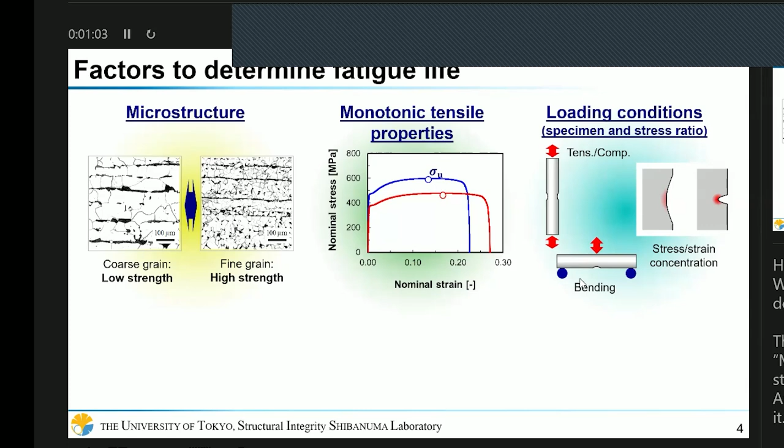Research background. How can we predict fatigue life? We know several dominant factors to determine fatigue life. First is microstructure, and monotonic tensile properties also has strong correlation with fatigue life. And of course, the loading condition affects it. So based on this information, we should be able to predict fatigue life.

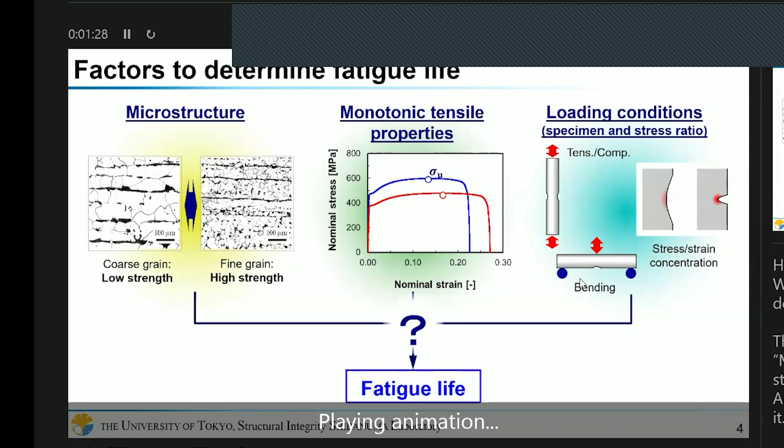However, the quantitative relationship among them has not been clarified yet. So the purpose of this work is to solve this very basic issue by establishing a multi-scale modeling strategy. That is the purpose of this work.

Next, I will show you the modeling basis based on experimental observation, which is the most important part of this presentation, though it's not numerical work but experimental work. This slide shows the test and observation conditions.

Using an ordinary materials testing machine, we perform tension compression test using a smooth specimen like this. And we observed the crack initiation growth process using a high magnification camera.

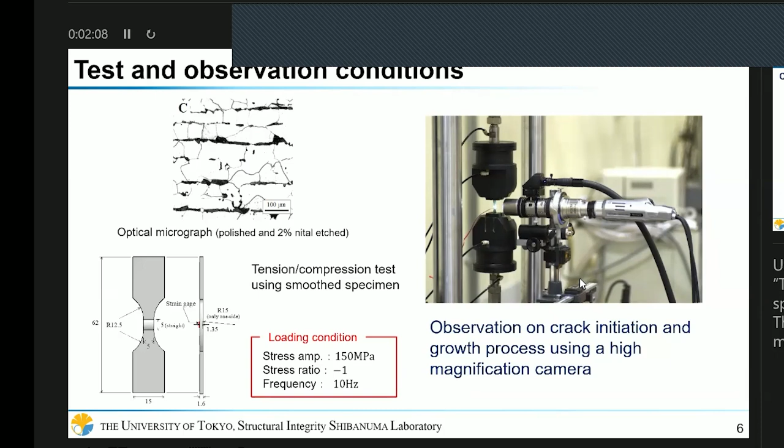This slide shows the observation results. The final number of cycles to failure was about 220,000 cycles. It's a typical ordinary high cycle fatigue condition.

This photo is a crack initiation site: 0 cycle, 2,000 cycle, 5,000 cycle, 10,000 cycle, 100,000 cycle, and 210,000 cycle, just before failure. So we can see crack initiation and growth from here.

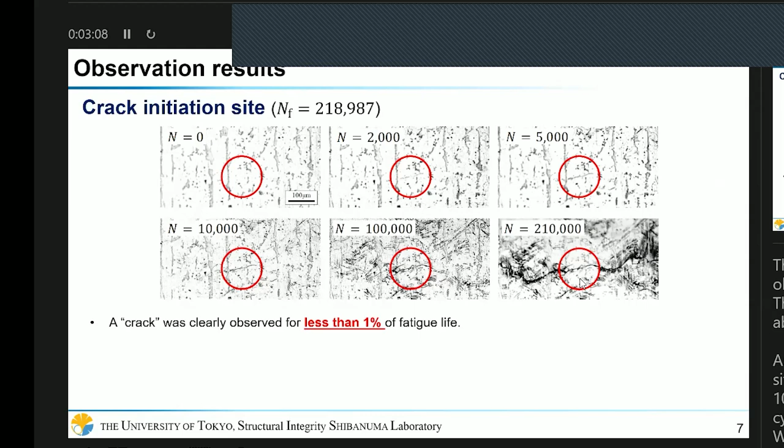At 0 cycle, we can see nothing. However, at only 2,000 cycles, a crack was clearly observed, even though it was less than 1% of the fatigue life.

This indicates that a crack initiation life does not exist, or is negligible, at least in this kind of material. In addition, from the last photo, we can see that the damage caused by the activation of multiple slip systems clearly increased after the crack passed the first grain boundary.

So the stage 1 boundary, between stage 1 and stage 2, may be defined by the first grain boundary like this. We developed a model based on these experimental facts.

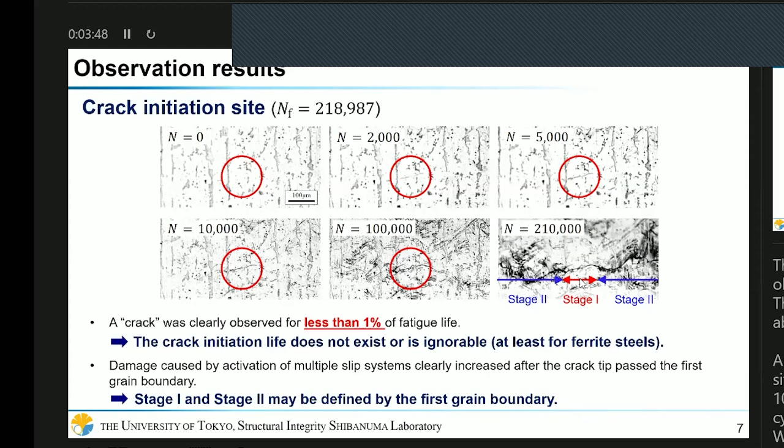I will show you the outline of the model presentation. This slide shows the modeling concept. The first one is the calculation of fatigue life.

Based on the experimental observation, it was difficult to define crack initiation life, though it is a very common approach for predicting fatigue life. But we ignore it. The entire fatigue life is estimated only from crack growth life. This is the most important concept of our model.

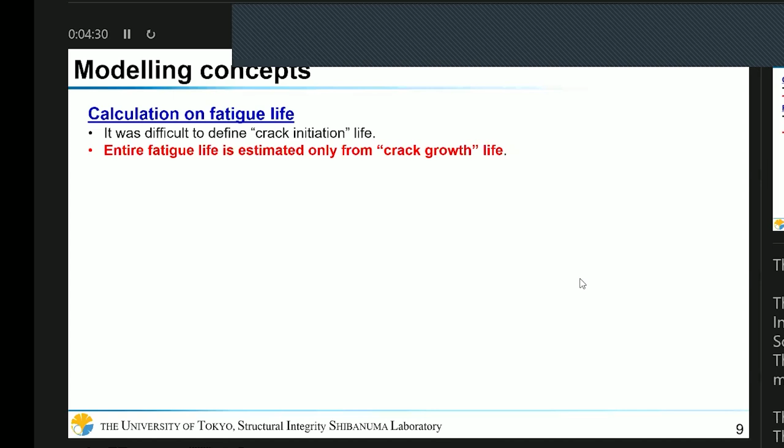The second one is the required input data. As I mentioned in the introduction, the microstructure information, monotonic tensile properties, and loading condition should be dominant factors to determine the fatigue life. So we use this information as the input data.

We don't use any adjustable fitting parameters, and we don't need any preliminary fatigue test data for the target steel. So it means we provide a pure prediction.

The third one is the dimension problem. Actually, fatigue crack initiation and growth is a very complicated 3D phenomenon. However, we already know some characteristic features, such as a crack generally initiates at the surface, and the crack growth direction is approximately orthogonal to that of the maximum principal stress.

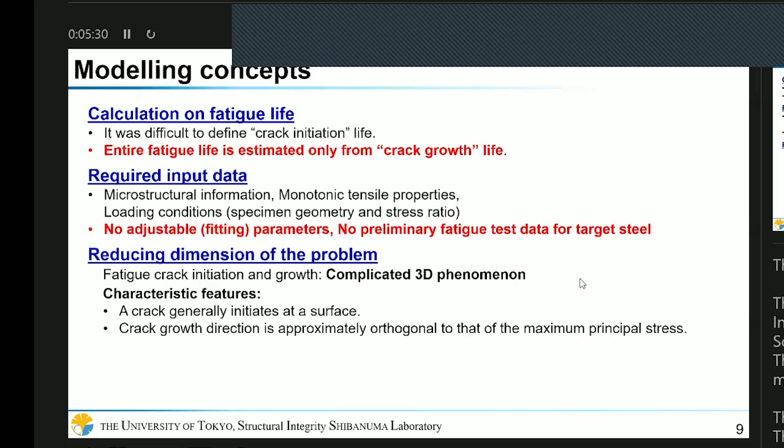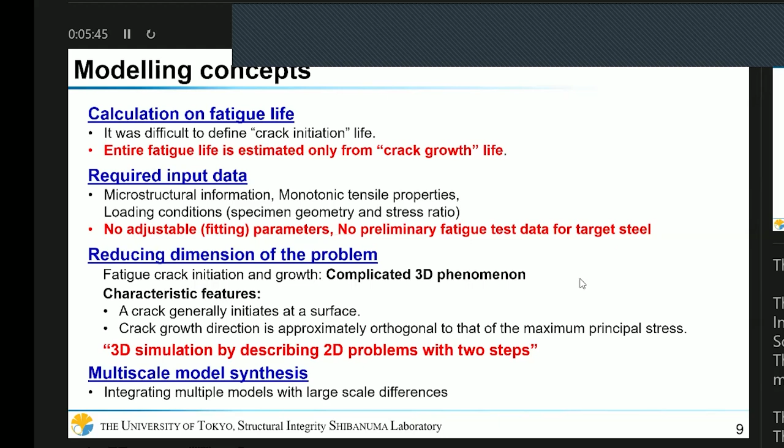This slide shows the outlines of the proposed model. This model is composed of three sub-models: macroscopic finite element analysis, microstructure, and crack growth. I will show you the outline of these respective sub-models.

The first one is macroscopic finite element analysis. Its role is calculation of the strain amplitude field and definition of an active zone.

As a cyclic stress strain relationship, we employ the empirical formula by Li et al. Using this formula, we can estimate the cyclic stress strain relationship based on only monotonic tensile properties.

And then we define the active zone as a surface domain based on the strain distribution. This active zone is an evaluation domain for the other sub-models.

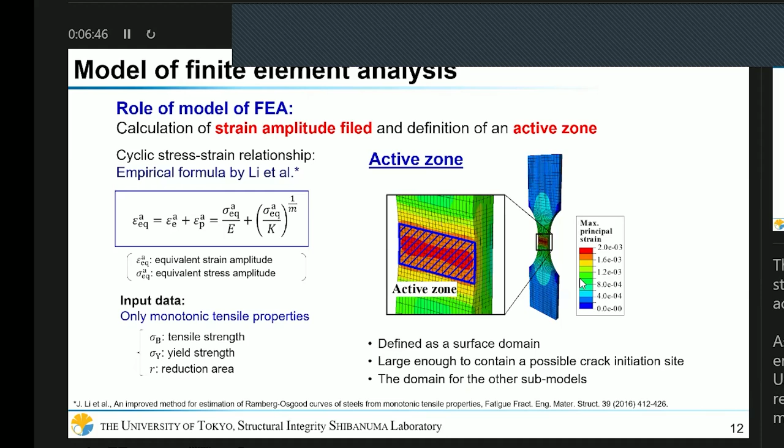The next one is the microstructure model. As I mentioned, we assume a 2D problem with two steps, and this 2D assumption makes significant simplification of the microstructure model.

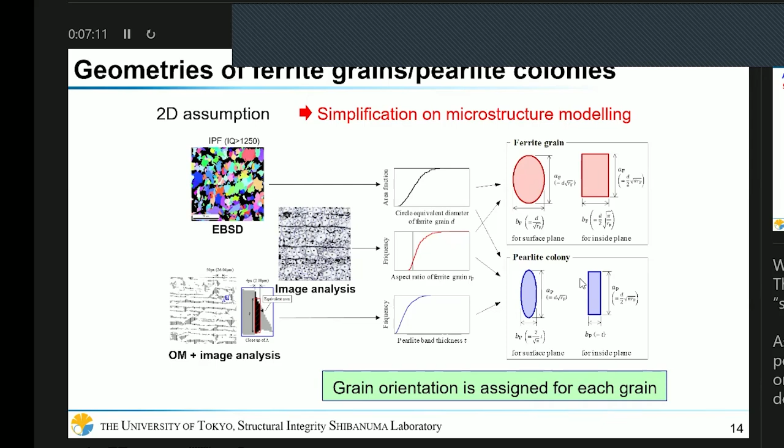As a geometry of ferrite grains and pearlite colonies, we assume simple ellipses or rectangles like this, based on the size distribution of the microstructure.

This slide shows the spatial grain distribution in the surface plane. The active zone is divided into surface elements, and we assign each grain into each surface element like this. All grains assigned in this surface element are assumed as possible crack initiation sites. This is our first 2D problem.

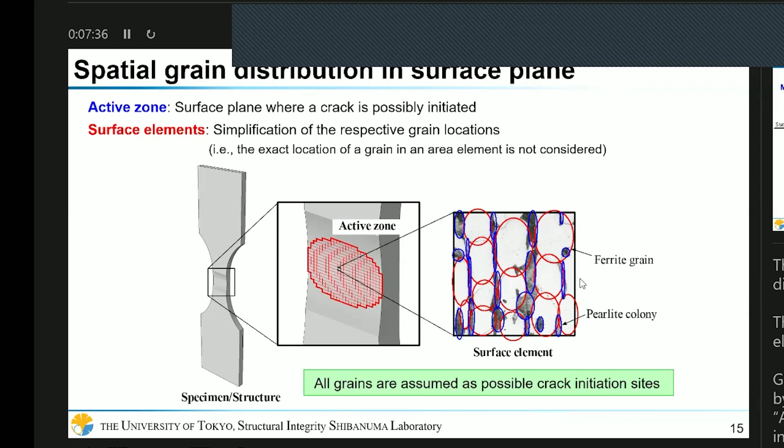The spatial grain distribution in the inside plane is modeled corresponding to the crack shape transition, as shown by these green lines. We assign grain on each line, and the thickness is averaged. Then we obtain the spatial grain distribution in the inside plane like this. That is the microstructure model.

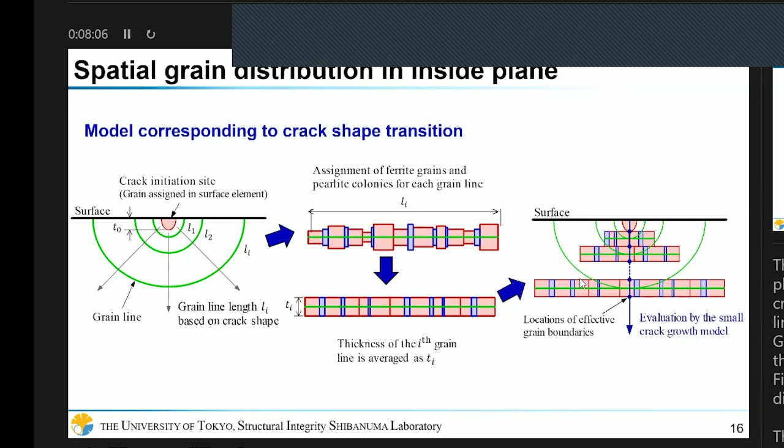It's very simple, and the last model is crack growth. Based on the observation results, we predict fatigue life based on crack growth simulation only. For this purpose, we employ the interaction theory between crack and grain boundary as a basic theory. This theory is described by these equations, but I will not explain the detail today.

Using this model, with information about grain sizes, friction strength to dislocations, and effective shear stress as the input data, we can obtain dislocation density ahead of the crack tip, slip length, crack tip sliding displacement range, crack growth rate, and fatigue life as output data.

So to perform this simulation, we need three kinds of input data. Grain sizes can be obtained from the microstructure model, so we have to evaluate friction strength to move dislocations and effective shear stress.

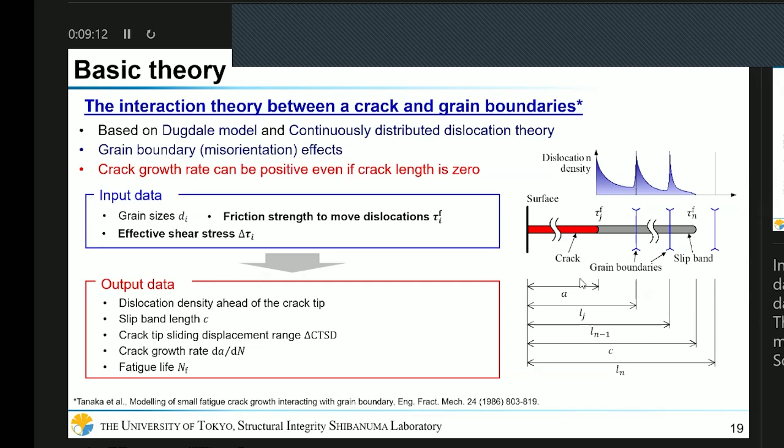The friction strength to move dislocations is a kind of material resistance in this model, and its physical meaning is the same as the yield shear strength of a single crystal. So we can estimate it based on the Hall-Petch law. Friction strengths of each phase, ferrite and pearlite, can be separated based on a linear mixture rule like this.

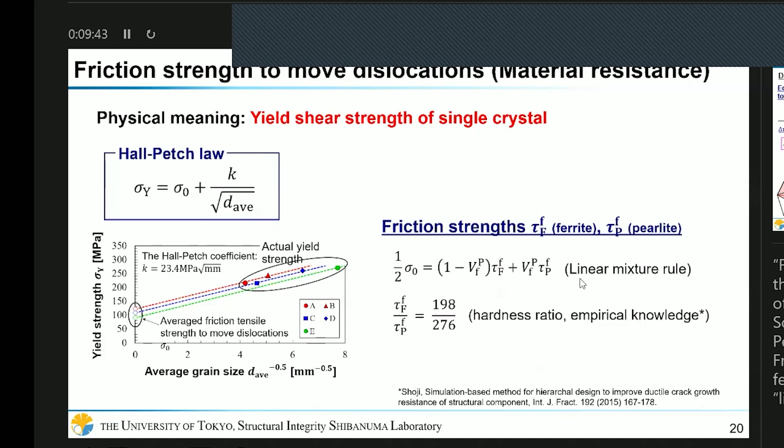The effective shear stress is a kind of driving force in this model, but the evaluation process of this parameter is a little more complicated, so I will show you only the outline.

First, we evaluate the equivalent stress tensor, corresponding to the total strain tensor obtained from finite element analysis. Considering the effect of crack shape, strain distribution, and crack opening/closure behavior, we evaluate the effective stress tensor range. Then, considering the slip system of the BCC crystal, we evaluate effective shear stress based on these expressions.

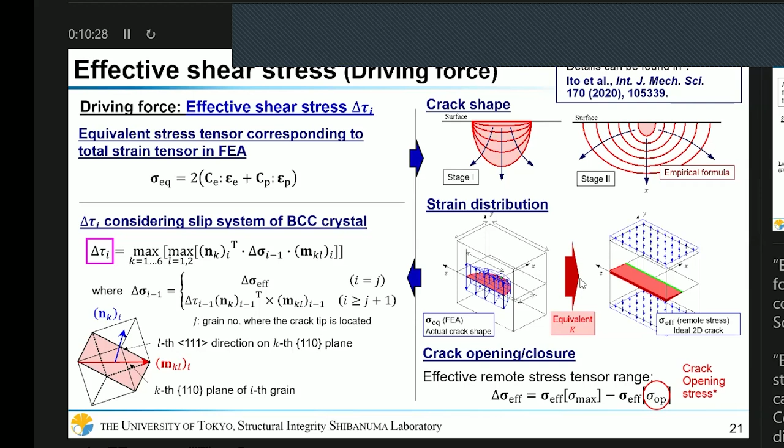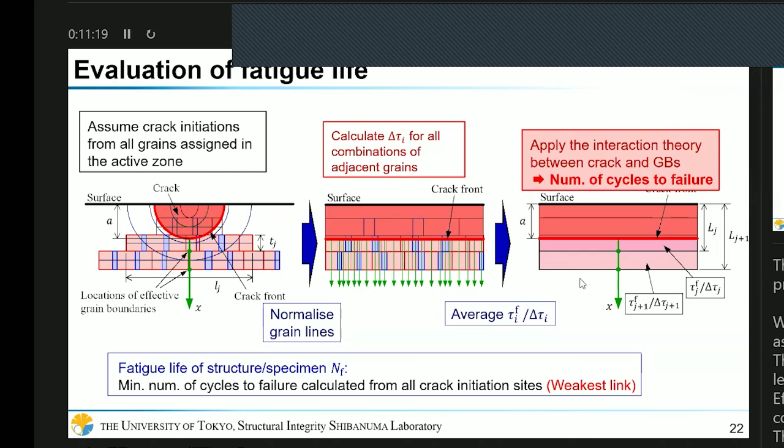By applying the interaction theory between crack and grain boundaries, we can obtain the number of cycles to failure from each crack initiation site. The fatigue life of the structure or specimen can be evaluated as the minimum number of cycles to failure calculated from all crack initiation sites. That is a kind of weakest link assumption of this model.

And then I will show you the strict validation. So we employ three kinds of steel. We can see a wide range of variation in the chemical composition, strengths, and grain sizes.

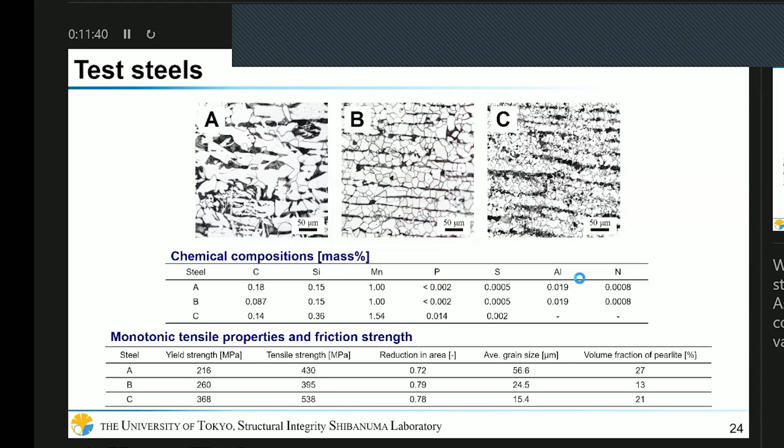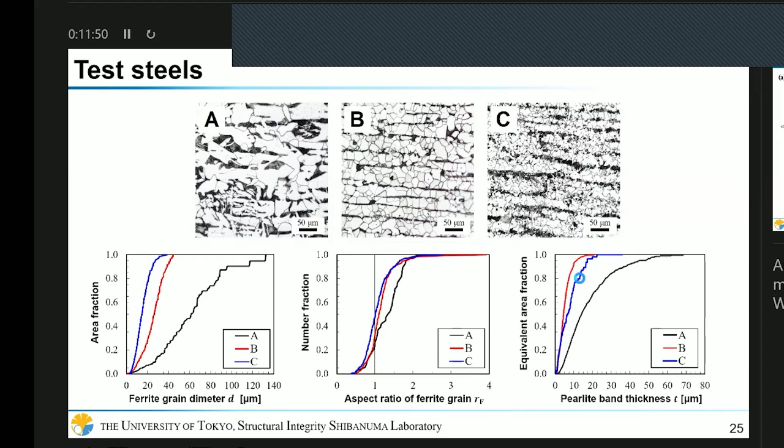These are the information of the size distribution of the microstructures, and we use this information as the input data.

We perform a fatigue test using four specimens: a smooth tension-compression test, a 3-point bending test with a dull notch specimen and a sharp notch specimen, and a fatigue test to observe crack behavior. So we employ 3 types of steel and 4 types of specimen, for a total of 10 types of fatigue tests.

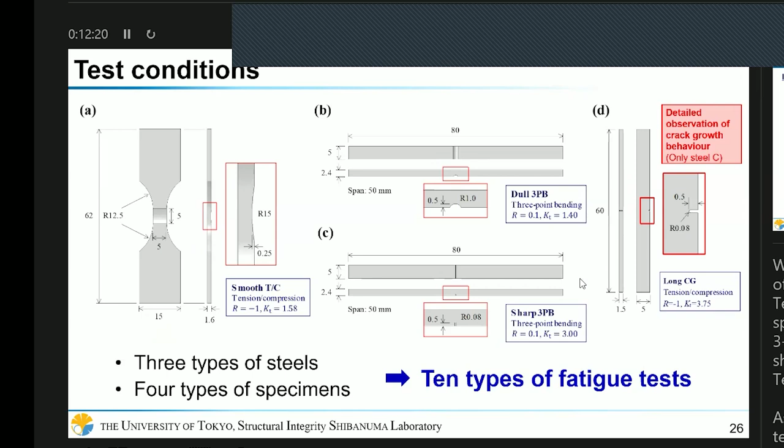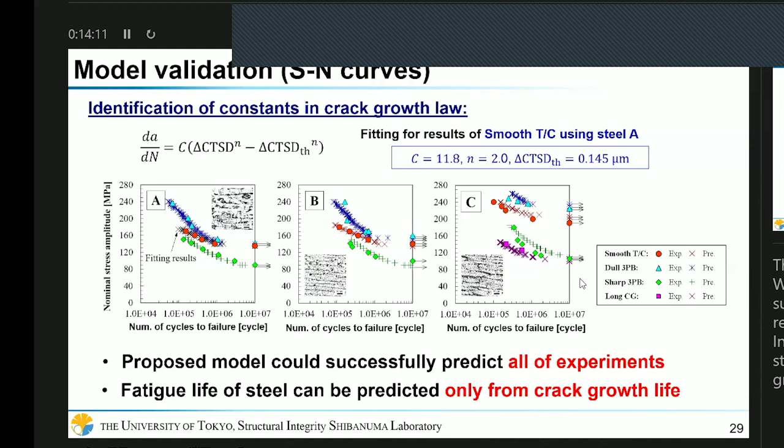So we try to predict these SN curves using the same parameter setting, and these are the results. We can see that the proposed model could successfully predict all of the experiments. These results indicate that the fatigue life of steel can be predicted only from crack growth life.

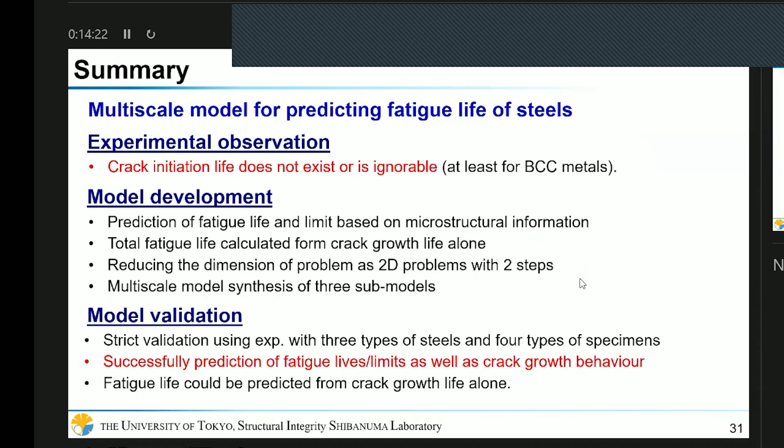Maybe due to time limitation, I will skip the summary part, but I want to introduce this only.